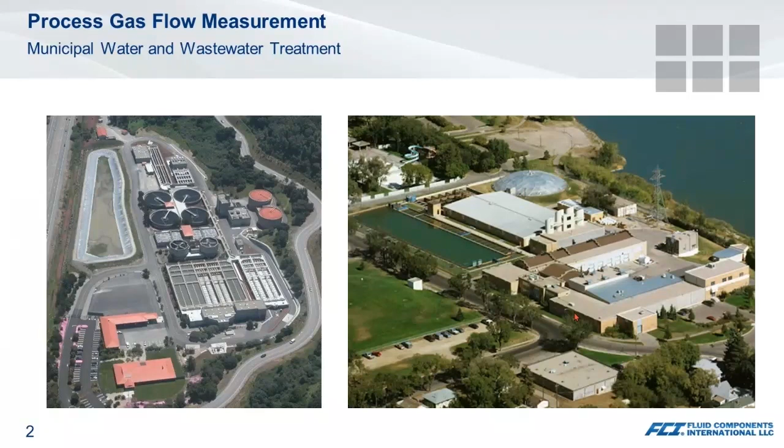One of the more common challenges engineers face regarding accurate flow measurement is insufficient straight run. With that, there's an associated issue tied into permanent pressure loss and how it affects energy costs. So when we talk about inadequate straight run, really we're looking at what's happening with our meter accuracy. Are there inaccuracies being introduced? My performance in the field is not matching up with the manufacturer's specifications.

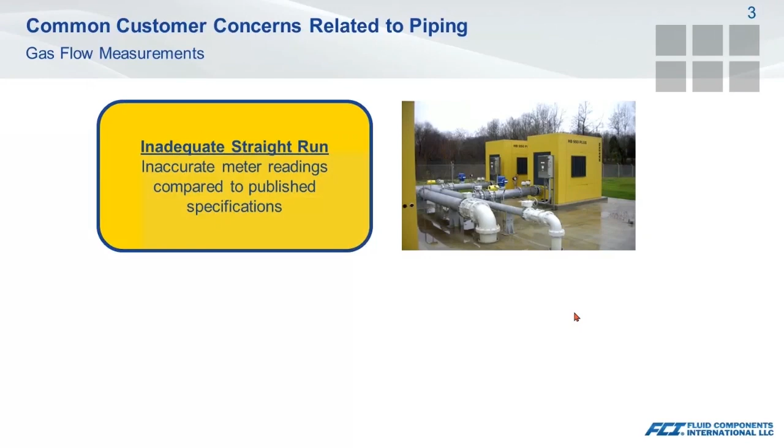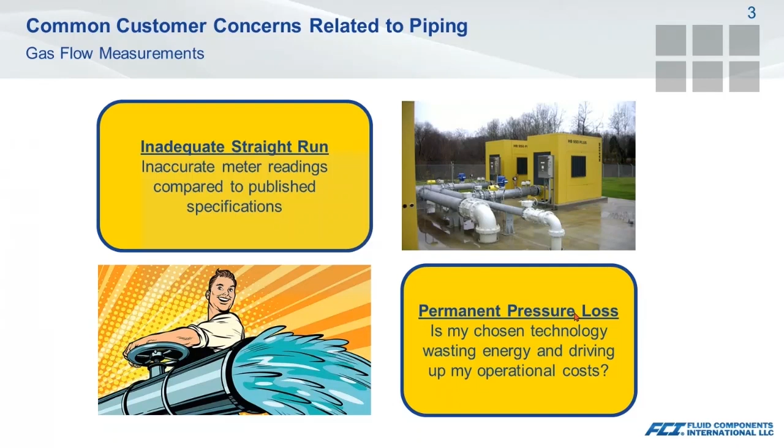Then we talk about the associated pressure loss. The technology that I'm selecting, whether it be the meter or flow conditioners, what's it doing as far as wasted energy goes? Am I losing pressure in my system that I don't want to lose? So those are the items we're going to look at here today.

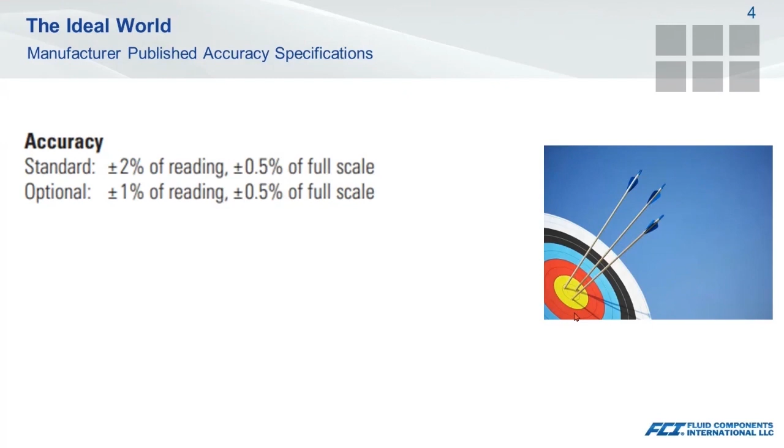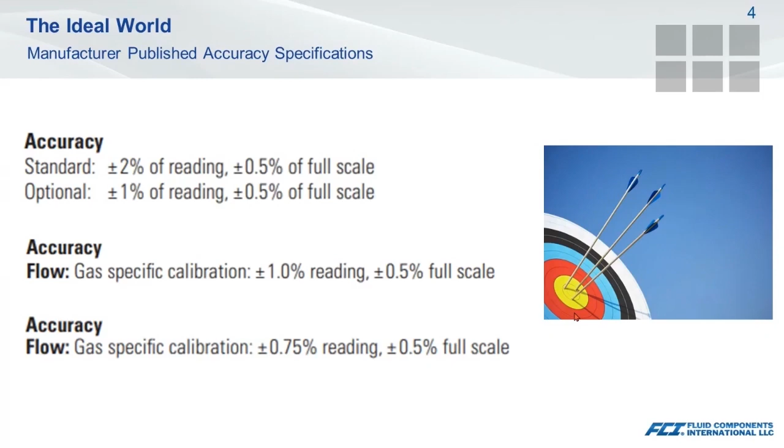So when discussing accuracy, I always like to categorize things as the ideal world versus the real world. Published flow meter accuracies for most technologies, regardless of the manufacturer, are based on fully developed laminar or turbulent velocity profiles. And when you look at these specifications within a brochure, you've got to keep in mind that these are always best case scenarios.

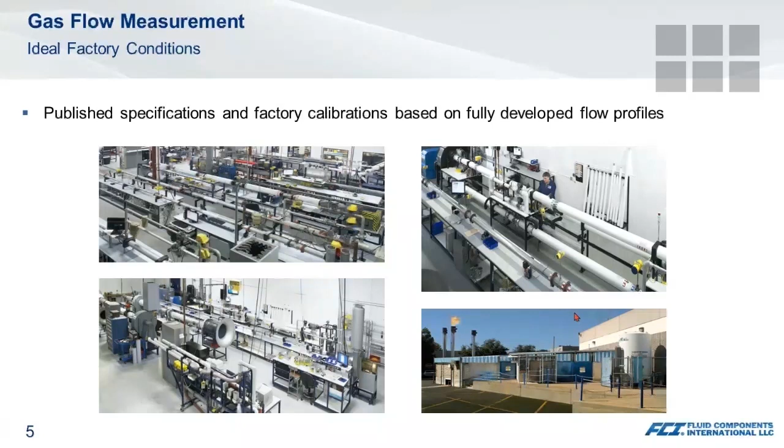It is worth repeating that the performance parameters for any flow technology you select are based on these ideal lab conditions. Everything's tightly controlled. You'll see things such as reference meters of a higher accuracy than the meter being tested, known flow profiles that are appropriate for the application process conditions, plenty of straight run, clean and dry gases, and flow stands that have the measuring range for the application so your flow turndown is met.

Many of today's common flow instruments utilize a single point measurement approach. For those technologies, calibrations are made based on the maximum velocity of a fully developed laminar or turbulent flow profile. And you can see that even between those two, that maximum velocity point can vary. So anything in our piping that disturbs that flow profile will come across as an inaccuracy in our measurement. Same goes for if we're in the Reynolds number transitional zone.

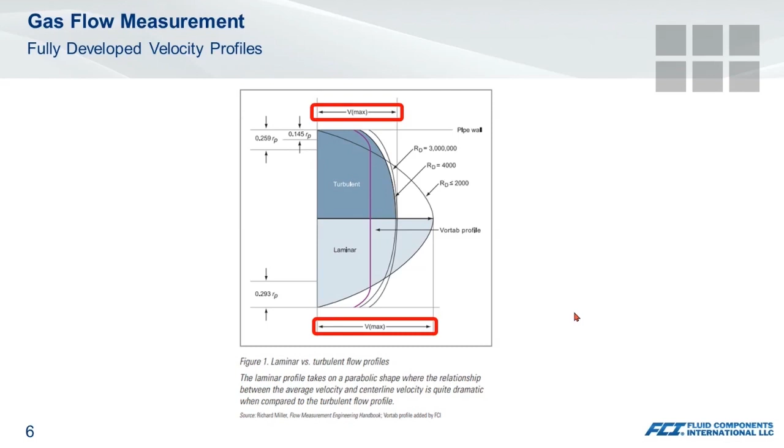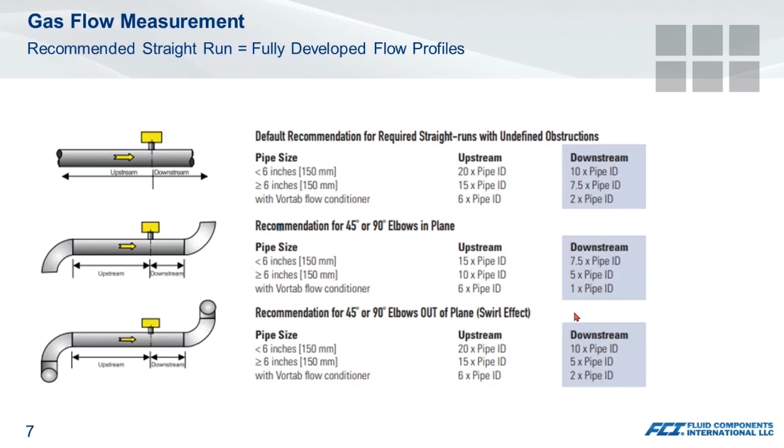Having 30 pipe diameters of straight run in smaller line sizes usually isn't a challenge. When you start getting into 12-inch or larger line sizes, a lot more real estate is required. However, there is a bit of forgiveness in the straight run requirements for larger line sizes for some of the common obstructions we see, illustrated in these two slides.

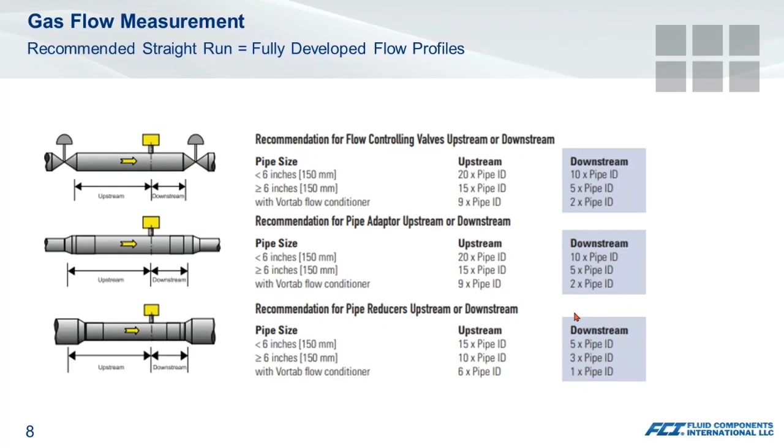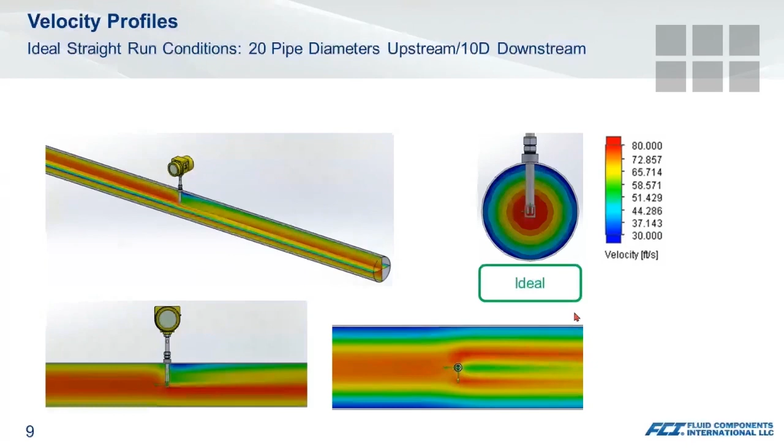What we see quite frequently is that the ideal lab conditions and applications in the field don't always line up. Sometimes there's a focus on larger capital equipment. Metering is more of an afterthought. There's coordination between the mechanical engineers and the electrical engineers and instrument engineers to make sure things get laid out appropriately. So when you look at aeration, anaerobic digester flares, and natural gas trains, a lot of times what you'll see is compact footprints, valving, elbows, just common obstructions you'll see in your system.

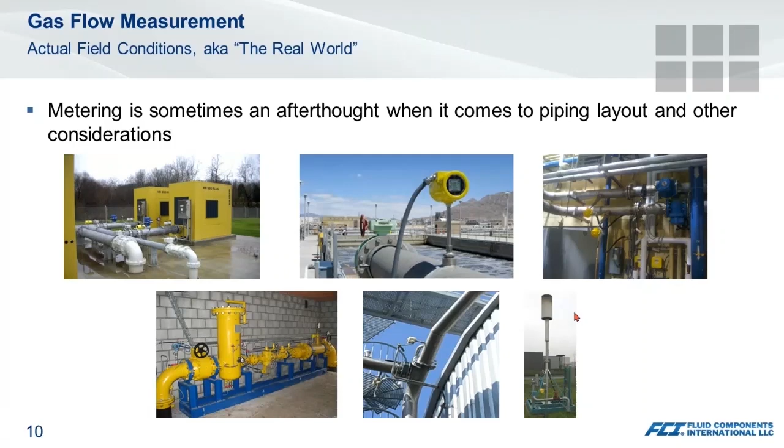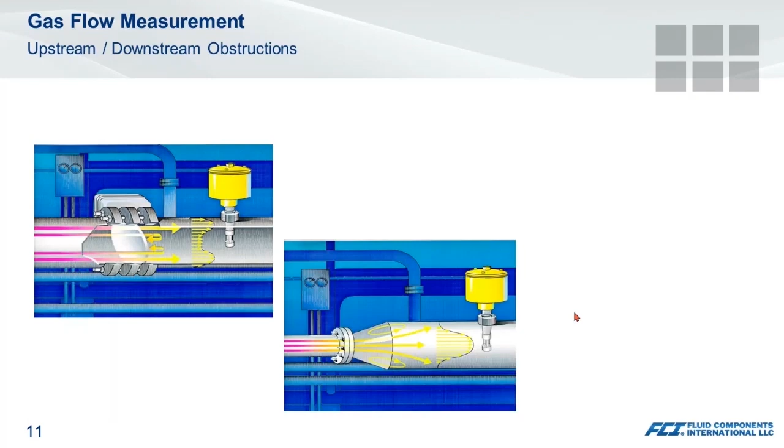Part of the challenge we see is getting our hands around what impact various obstructions will have on our flow profiles. In almost every case, we see the velocity seen at the center line of the pipe no longer matches up with the maximum velocity the instrument was intended to measure. Depending upon the obstruction and its location, we can be reading higher or lower than expected.

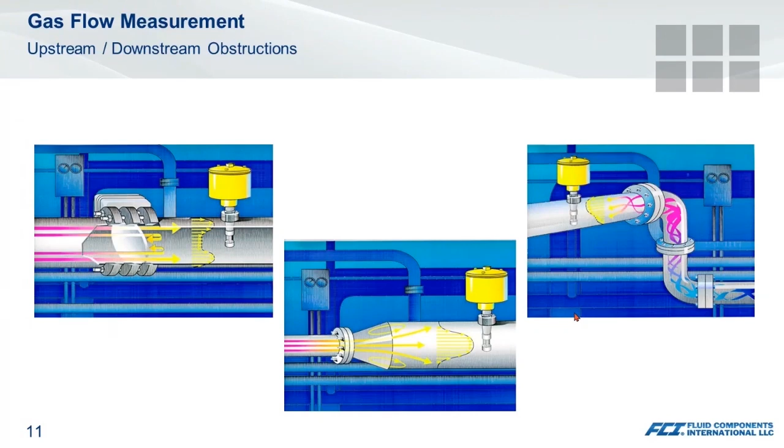So one key piece of information we need to know when reviewing our piping conditions is what will be an acceptable level of measurement accuracy. Is it 1%, 5%, 10%? A lot of times design decisions will come down to how repeatable the measurement will be, even if the accuracy is impacted. So next, we're going to look at a few of the more common obstructions and see what changes occur in the velocity profiles, and get an understanding of the impact each has on accuracy.

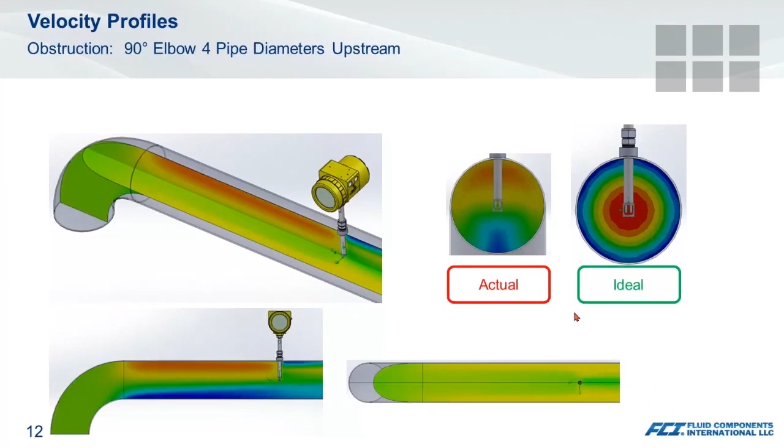Here we see a 90-degree elbow that is 4 pipe diameters upstream of the meter location. We can see that the higher velocities skew towards the top of the pipe. Although this type of obstruction is very benign, we do see an additional inaccuracy. As you look at this slide, you can see that we don't have that fully developed, roughly bullet-shaped flow profile condition occurring. So even at 4 diameters upstream, we could see an impact on our accuracy as much as 4.3%.

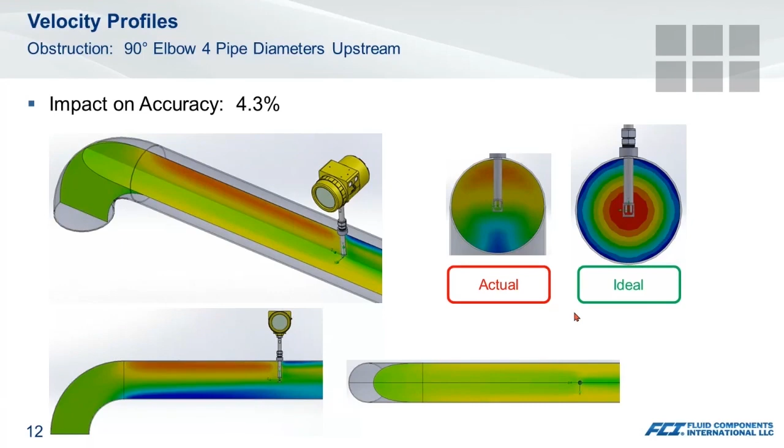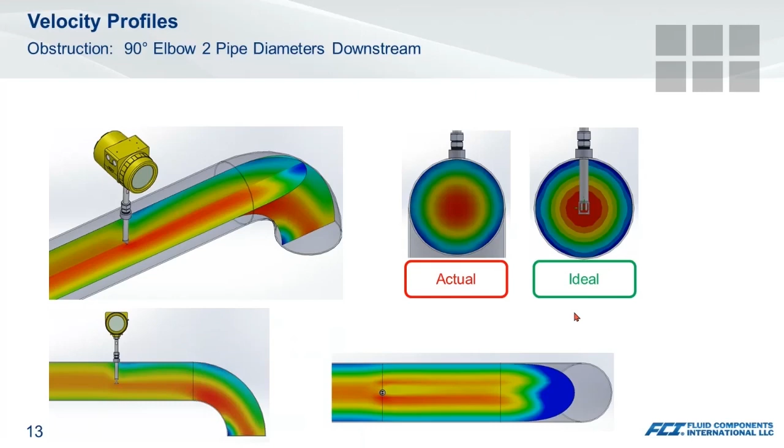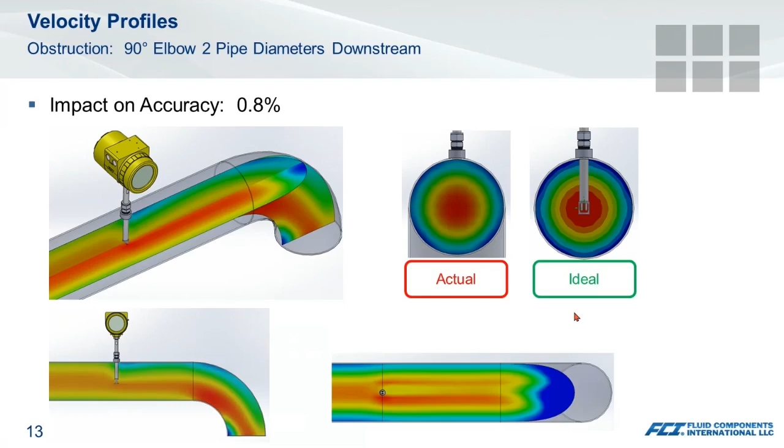The next thing we look at is just moving that elbow downstream, moving it down 2 diameters, keeping 20 diameters upstream. This one doesn't have as great an effect on the flow profile. You can see here that it's close to what we would consider that ideal condition, still not fully developed. So there is some effect with inaccuracy, and we see that inaccuracy being in the range of 0.8% in this piping condition. Definitely an improvement from when it was upstream.

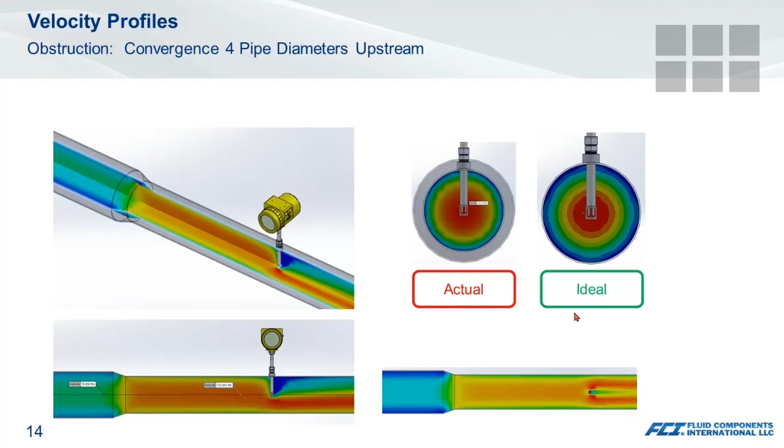Here we have a convergence from a larger to a smaller pipe that is located 4 diameters upstream. We can see that the velocity profile is similar to ideal conditions, but we do have some slightly higher velocities through the center of the pipe at the meter location. Like our elbow, it's fairly benign, but will still impact our accuracy. And in this case, that convergence is going to impact it by roughly 1.3%.

Given that it is being used as a control device, the velocity profile will vary by the position of the disc. So looking at worst case conditions, we would see an additional measurement inaccuracy up to 15%, which in a lot of cases is very significant.

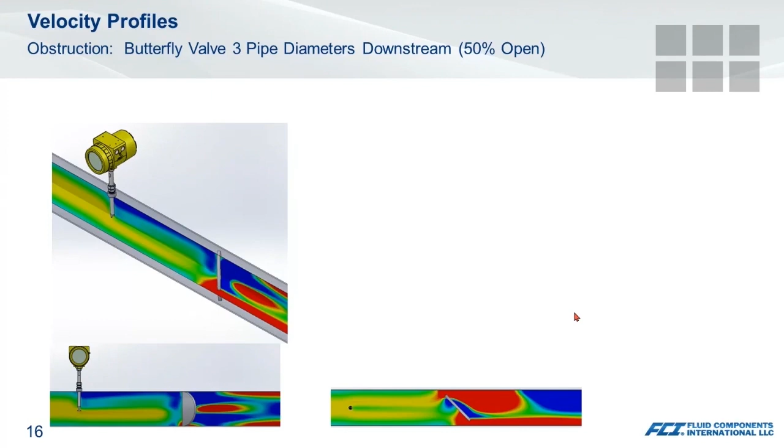Moving that same butterfly valve downstream of the meter improves accuracy tremendously. However, we still have impacted the accuracy by another 1.7% because that actual profile is still slightly distorted compared to the ideal. But it has made that significant improvement in our measurement.

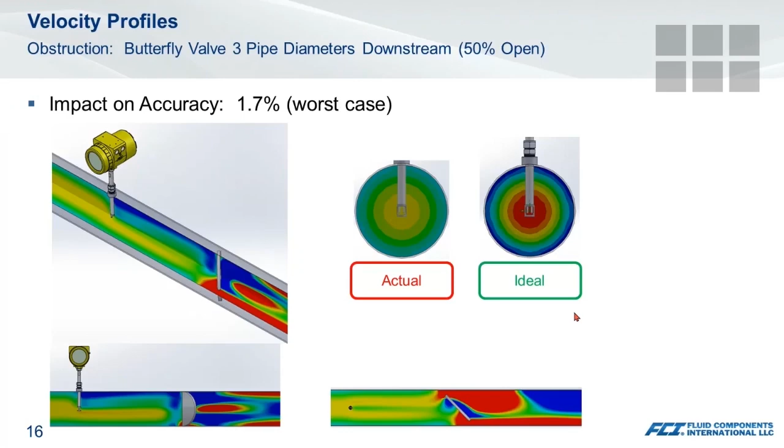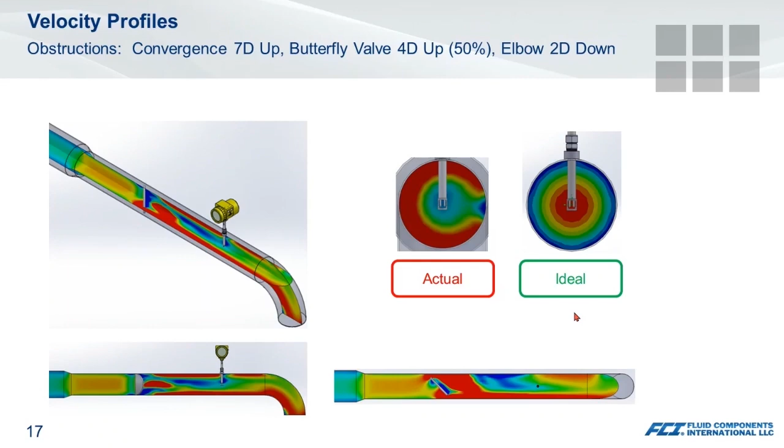And actually in this condition, we're looking at a worst case accuracy impact of 18%, because that's going to vary depending upon the valve position. So all of these examples illustrate that the type and location of an obstruction will impact your overall measurement accuracy. Moving them closer to the metering point will further magnify those errors, and moving them further out will help minimize them.

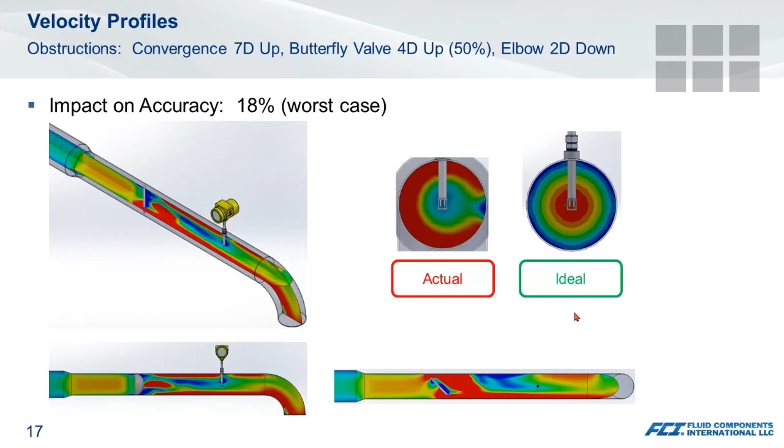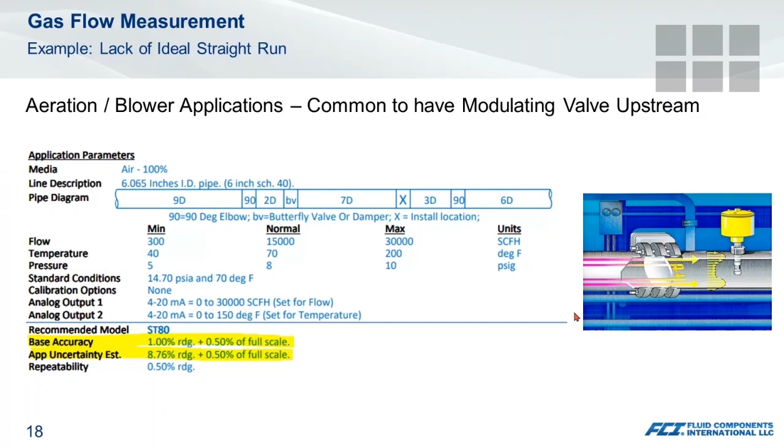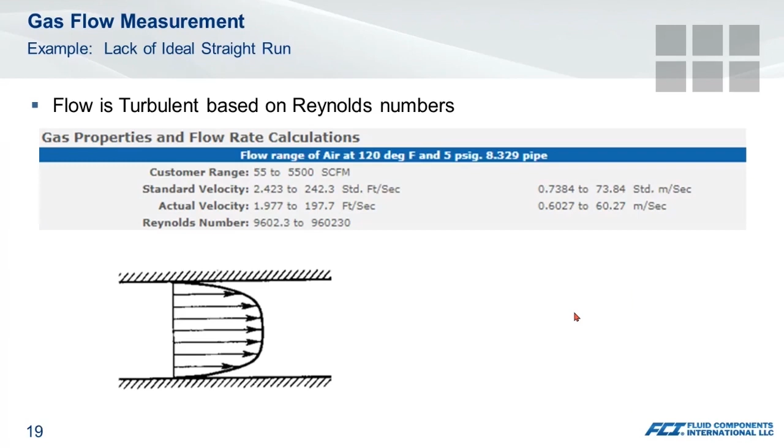For the given example, the flow is going to be turbulent, and based on having a modulating butterfly valve upstream, we inherently know that the meter accuracy will be affected by the position of the disc. We no longer have the rounded profile associated with a fully developed turbulent velocity profile. Velocities at the wall of the pipe are going to be much higher than those in the center line in most cases. So what can we do to improve meter accuracy if we are unable to rework our piping design?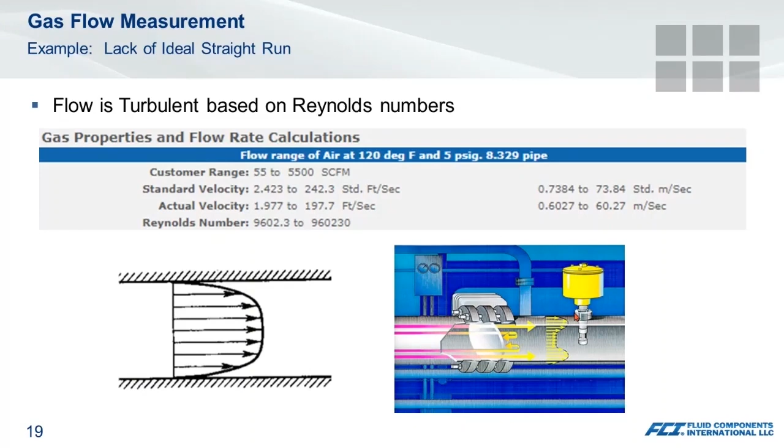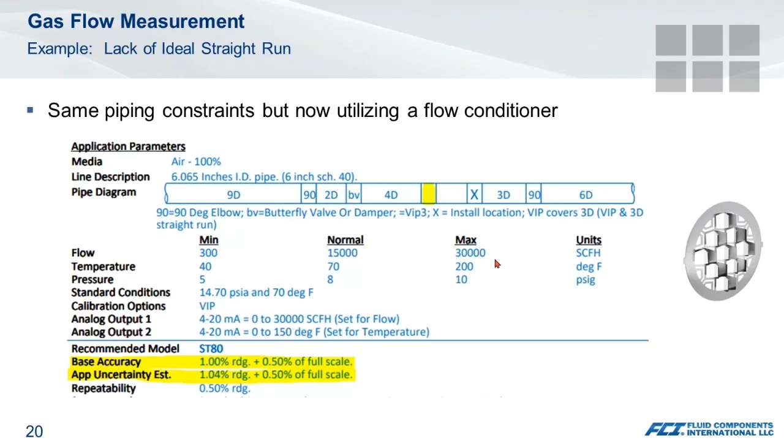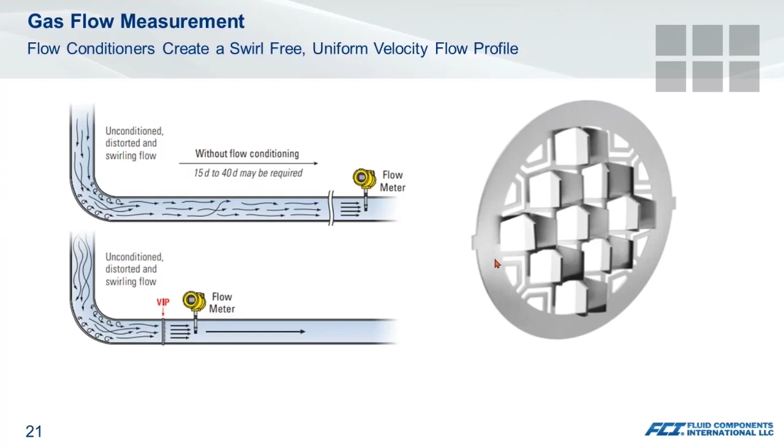The purpose of any flow conditioner is to take that less than ideal velocity flow profile and make it more uniform and repeatable. The device is going to allow a flow meter to more accurately measure gas flow when piping conditions are poor. In many cases, it'll allow you to reduce the footprint of your piping in lieu of designing longer meter runs. Typically, the choice of using a flow conditioner in an application comes down to the required accuracy of the flow measurement.

So we're going to look again at our earlier example where we had a convergence butterfly valve upstream and an elbow downstream. And keep in mind that no flow conditioner is going to create a perfect laminar or turbulent velocity profile. The objective is to create a repeatable profile that can be accurately measured. So in this instance, we've put in that flow conditioner. You can see it upstream of the meter, downstream of the valve.

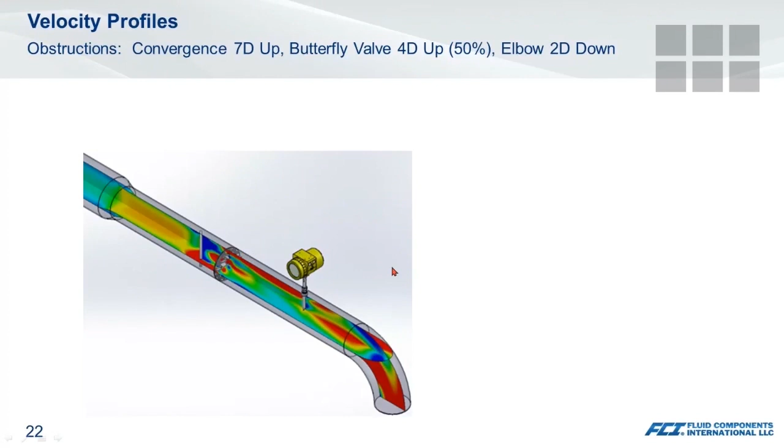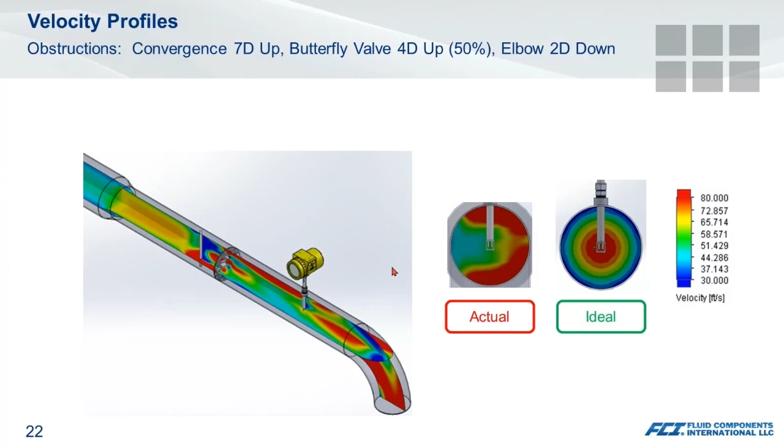So as you can see here, we don't have a fully developed flow profile, but we're much closer to the average velocity. And by properly calibrating our instrument to this new profile across the entire flow range, we can greatly reduce the amount of error introduced into our readings. So in this case, we went from 18% being our worst case to bringing it down to a very acceptable 0.8%, just by utilizing the flow conditioner in the application.

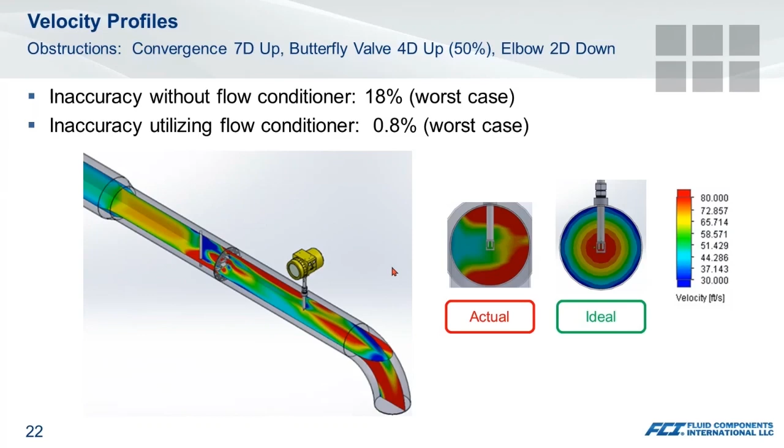Now, greatest value is typically achieved when the flow meter is calibrated for that specific flow conditioner profile. As such, distance between the meter and the flow conditioner should be optimized, and manufacturer recommendations should be followed. Otherwise, you're going to still notice inaccuracies in your reading.

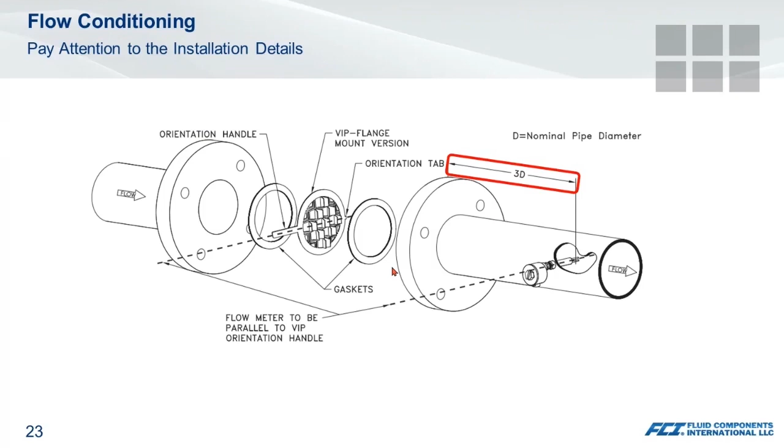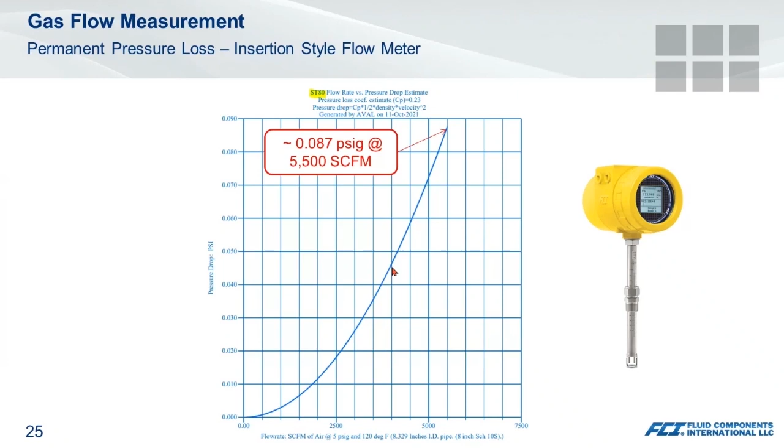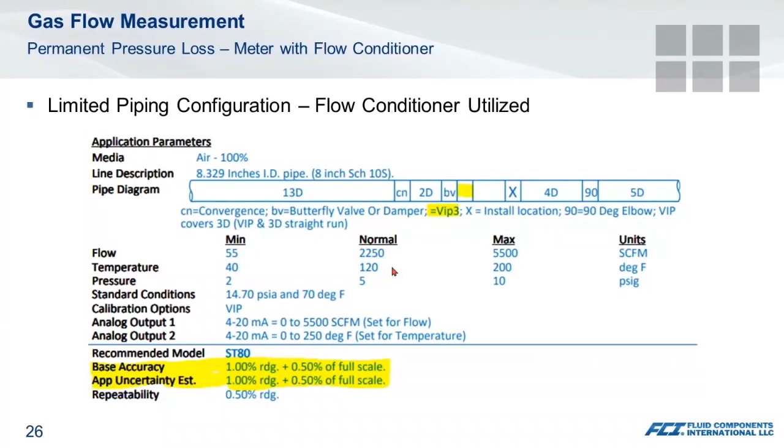So now we're going to take that same model and introduce our flow conditioner. Again, we've seen here that we've greatly improved the flow measurement accuracy through this approach. It's almost back to manufacturers' published accuracies. However, we have now introduced a new obstruction that's going to impact the permanent pressure loss associated with the measurement.

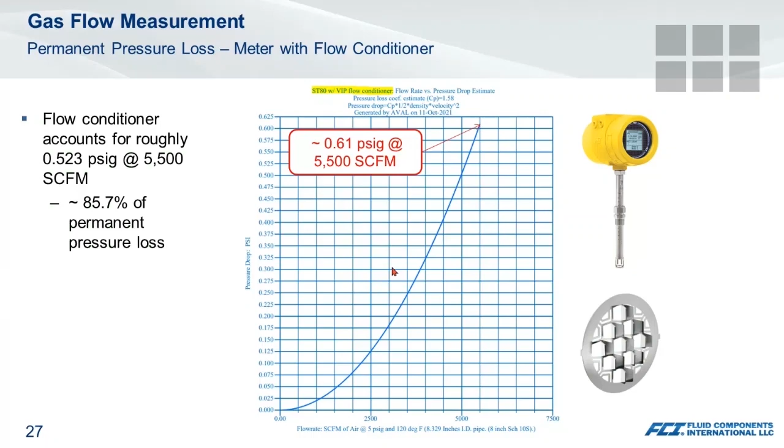So when you look at a pressure loss curve for the combination of the devices, the overall pressure loss has jumped from 0.087 to 0.61 psi. We see that roughly 86% of the pressure drop is related to the flow conditioner. This then raises the question of whether or not there are some designs that introduce less pressure drop than others.

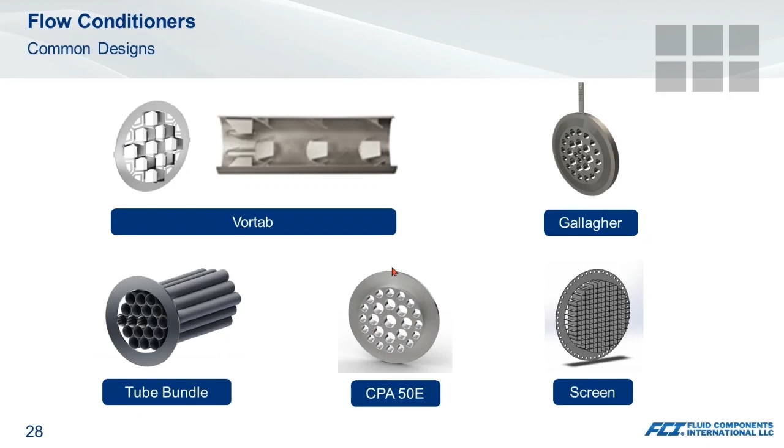There are several designs on the market that perform the function of flow conditioning. A few of the more common designs you'll see include Vortab types, plates, and tube bundles. In every case, the goal is to take a distorted velocity profile and straighten it out so an accurate measurement can be made when there's limited straight run available, just trying to create this repeatable flow profile. However, each design is going to vary as far as permanent pressure loss goes.

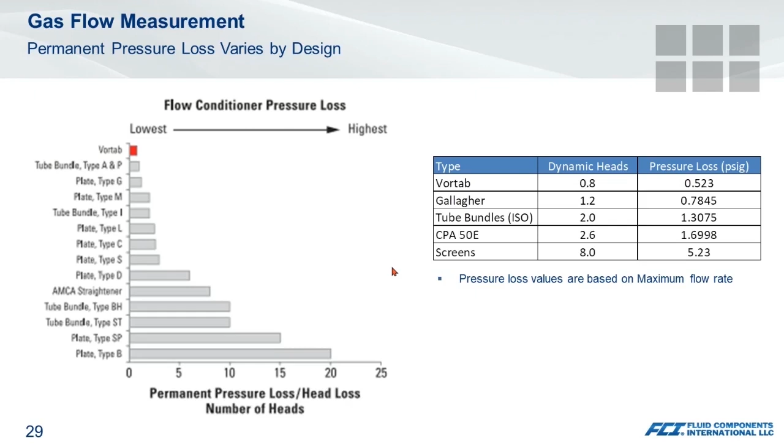So, I'm flying through this thing.

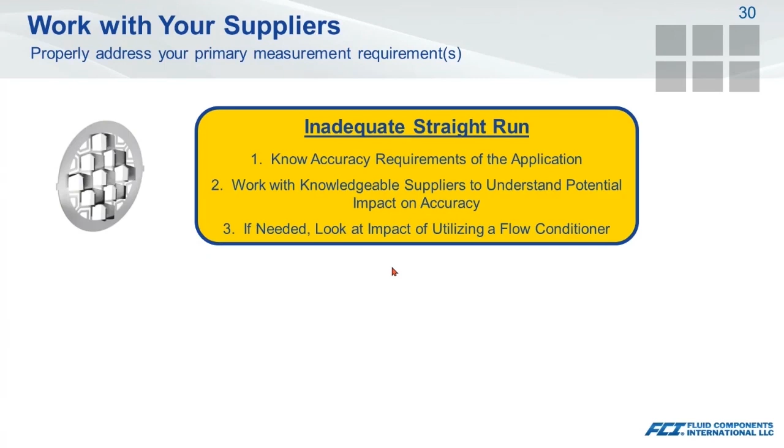So to quickly summarize today's workshop, a little bit short here. We want to look at our inadequate straight run. So some of the things we ask: what is the maximum acceptable accuracy for my application? If I don't have adequate straight run, how can I understand the impact on my readings? If my accuracy requirements are not met, will a flow conditioner help me meet my objective? It is not a given, so it should still be evaluated.

On the side of permanent pressure loss, are we wasting energy or robbing our process of working pressure? We want to look at things such as, is the selected technology I'm using for this flow measurement minimizing my pressure loss? Does the same go for a flow conditioner if utilized? How much pressure loss is acceptable?